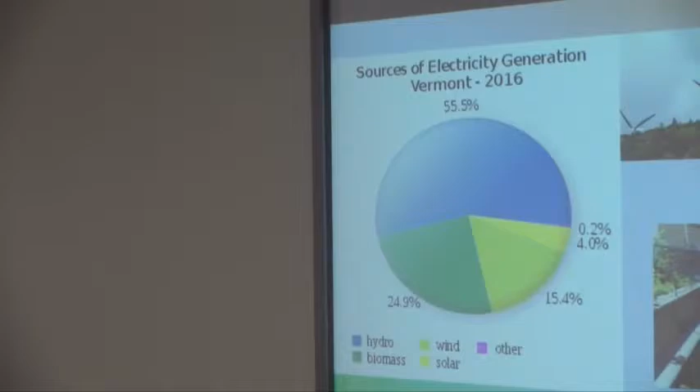But that doesn't mean you can only go with one. When you look at Vermont's energy grid, you can see that most of it is actually hydro. The interesting thing that's happened in Vermont, dissimilar from a Massachusetts problem, is that we have not forced utilities to divest from either distribution or generation. So all that's going to Canada, because the same company owns 79% of our distribution grid and generates 82% of our power - the same parent company owns GMP and Hydro-Quebec.

So anyway, most of it's hydro anyway. Vermont actually ends up having this really great renewable portfolio. However, all of it's generated out of state, which is not good for the local economy. It's generated under foreign standards, so it likely doesn't really qualify as a renewable energy source, which is something we'll get into. But that's an overview of how Vermont's energy grid lays out.

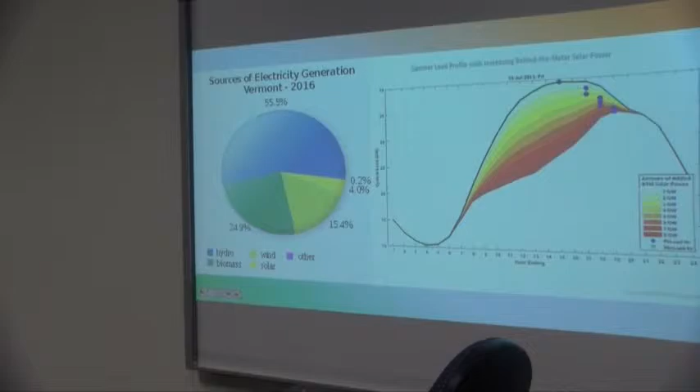Now to go into the weeds - I want to talk about the balance between the importance of solar versus the importance of hydro, because they're both equally important within a grid, but they do two very different things, which is where legislators tend to get confused. Solar does something really important: it attacks something called peaking, addressing it directly and effectively.

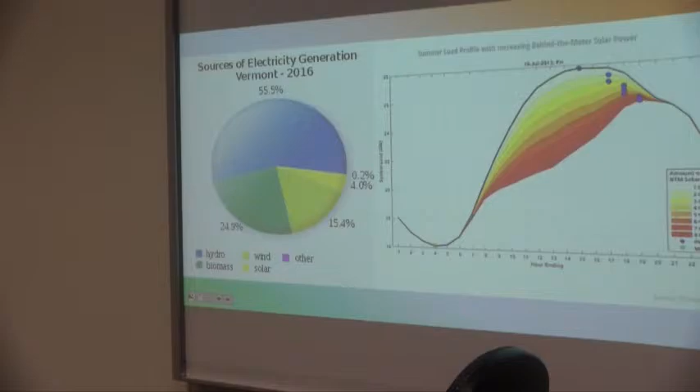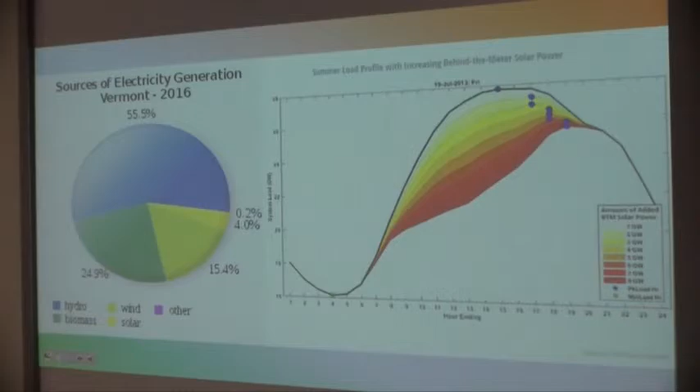Peaking tends to happen, I think in Vermont, between 11 and 2:30, when usage goes up - air conditioners are on, everybody's in their office, using a lot of electricity. That's conveniently when the sun is right overhead, when solar can do the most good. So during this bubble in the middle of the day, we have a massive spike in energy use every day, and solar is a very good tool - probably my preferred tool - for dealing with peaking.

The direct result is that when you have an energy spike, utilities have to provide for it. They fire up a coal plant, or a fossil fuel plant like natural gas or propane, because you can't just fire the nuclear plant up and down, up and down. You can also defer to firing up hydro plants, but then you're no longer running renewable energy because you're not running as a run-of-river, which we'll get into later.

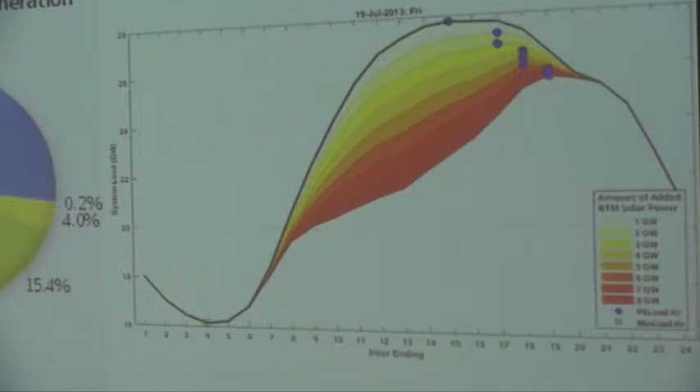So for the renewable choices, solar happens to be the best. However, where does the other 80-85% of your actual usage come from? In this case, we're talking about needing a spike in instant use - a sudden burst of power - but that's not what I'd call the base load, the 24-hour cycle of things always running that need a massive amount of production.

Again, getting into the difference between a solar and a hydro plant, the solar is producing 4.2 hours a day, the hydro is producing 24 hours a day. You have a different unit of production on the same size, same capacity unit. I hope nobody's glazing over yet. So solar, again, is very important, but it does something very different. It attacks peaking and not base load power.

Did you say 4.5 hours solar? I think it's 4.2, and I think that's from a study done a while ago, and that's a little further north than here. Yeah, I think it was actually Burlington, Vermont. Off a non-tracking array, you get 4.2 peak hours of daylight.

Which will get into what I talk about with the energy terroir. What Vermont's doing is going solar, great, let's just put it in everywhere, which is Arizona's energy plan. That's not Vermont's energy plan, because the same solar panel yields you twice as much production in Arizona or California or Florida than it does here. So while you can keep generating, you get half as much production, which you could infer costs you about twice as much to make every kilowatt hour, which is not good for everybody paying their utility bill, because your utility bills just go up for a very long time.

So somebody, I really wish I could remember who did this, I want to say it was somebody out of Stanford, took the time to do the Solutions Project, which if you Google Solutions Project, it's really cool, you can pick all this data. I've chosen their model right now as an example of how you would look at, for the United States, what the energy mix would look like if you were shooting for 100% renewable energy.

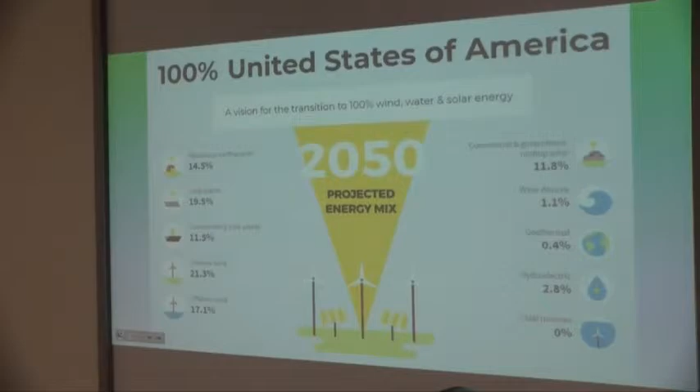I'm not going to spend too much time on this, but I wanted to show you one thing we can distill out of this: that you can achieve it, but you need to look at the mix that you need, which is the term I've been trying to develop, the energy terroir. What are the resources you have to work with? Because you can't just pick a resource and use it if it doesn't fit where you live.

So for Vermont, let's just look right now at only two things. Offshore wind, zero, right? There's no coastline. Hydroelectric, 64.4%. But let's look at how that shakes out against Massachusetts. Offshore wind, best model is actually 55% offshore wind because you can do deep, and this is really deep offshore wind. The wind blows all the time and it actually provides constant energy.

And hydroelectric, 1.4%. So starting to think about how you put that together, the further you are from the coast, the more you're going to want to invest in solar and hydro as energy sources, because there's a cost of transmission. There's a line loss, you're actually giving off heat and you lose power as you transmit it over great distances. So that's a factor, that the further you are from that offshore wind source, the more you want to think about an alternative.

Now, I can't say that these numbers are exactly right, but I put them up there as an example, because when you develop a grid, the things within that grid and within that system really matter, the natural resources do.

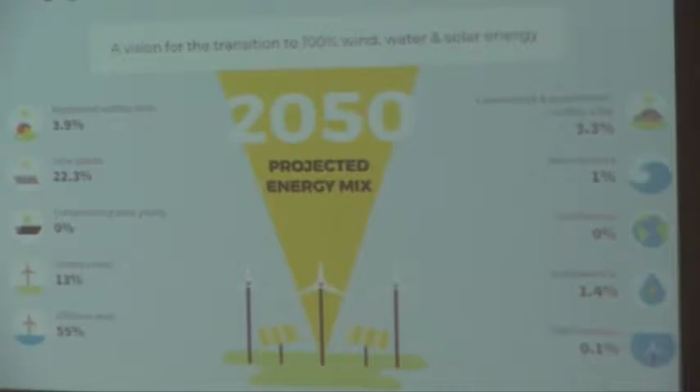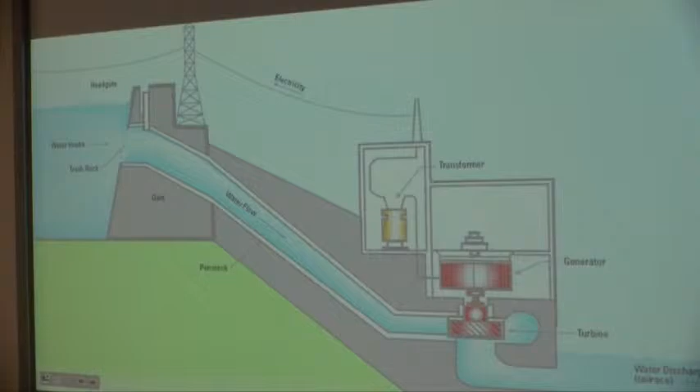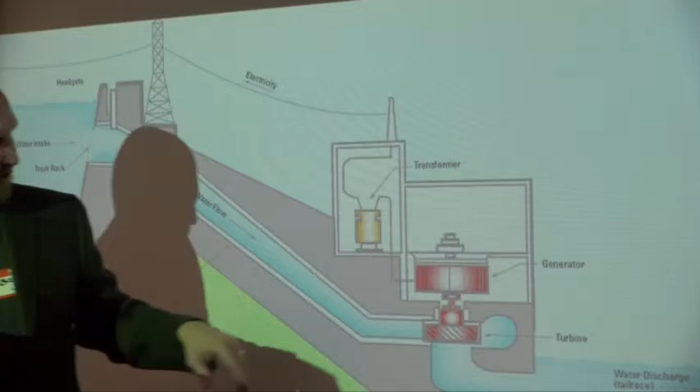So how does hydroelectric work? I like this drawing. So you have water at a higher source that flows through, and all this is going to do is spin a turbine. I'll show you what turbines look like, there's a lot of different varieties for different applications. And then it's just discharged through a draft tube that creates some suction. It's spinning, depending on how you do it, a flywheel or whatever that is, that's going to spin a generator and send it out to the grid. It really is just spinning a wheel, spinning a flywheel.

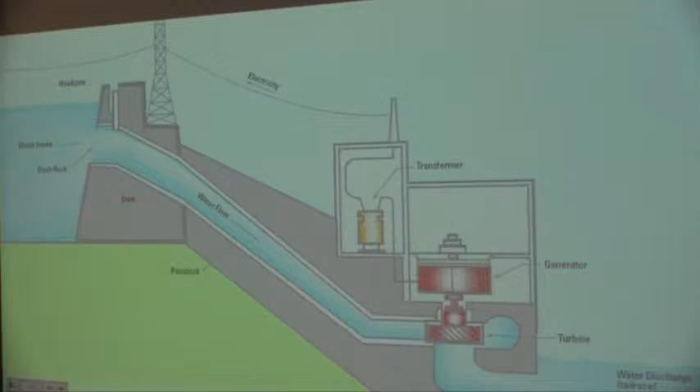The technology, other than that we involve electricity, hasn't changed much since water wheels. The water just spins something and you're trying to harness the energy from that. You're trying to transition that horsepower into whether it's a water hammer or an electric generator. All you're doing is transferring energy. That's it. That water represents power, and you're trying to capture that power and convert it into a useful tool for whatever it is you happen to be doing.

So one thing, and I don't want to go too technical, but it's important to know that there are actually different types of hydro. There's more than I'm going to cover here, but it's good to know what they are.

Vermont Tissue Plant, this is the one I was talking about before that we commissioned to improve the water quality. Part of that is the fact that the plant's on right now, but there's water going over the dam. This is a run-of-river project. In simplest terms, outflow equals inflow at all times. We don't store water. But if we did store water and we were like the Hoover Dam, suddenly we are not a renewable energy source.

Sorry, could you repeat the name of this kind of run-of-river?

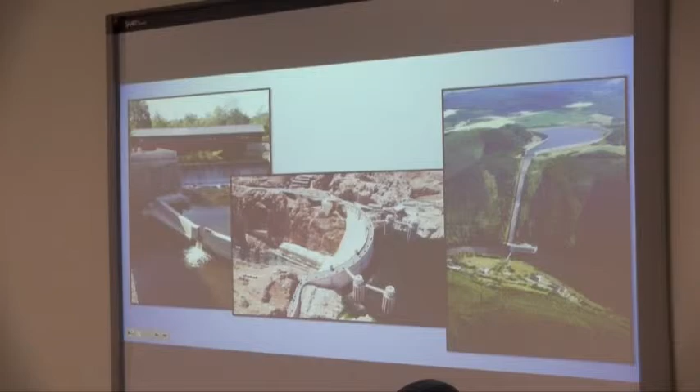Run-of-river. So then you get into conventional storage, which is build a big dam. You let it keep filling. When you need it, like during peak demand, high usage, whatever it is, you turn on turbines in sequence. You keep turning on more and more until you've met your demand. And then at night, you slowly turn them back off and your reservoir starts to refill.

One of the bigger problems with that is it's so reliant on water that you'll find that Hoover and Glen Canyon are at, I think, less than half their actual design head height, so they aren't making much power anymore.

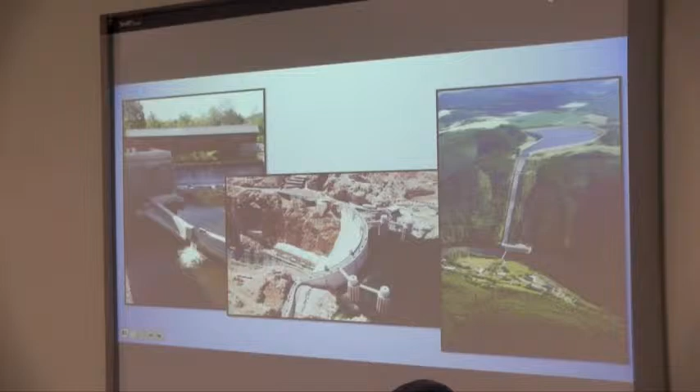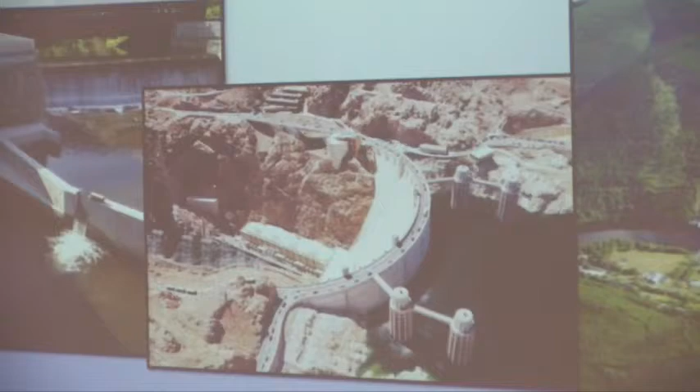And there are a lot of reasons why that's not a renewable energy source. There's a downstream cost because you're raising and lowering the water level. There's an upstream cost, you get algae blooms, which actually give off CO2. So it's way too much to go into here, but suffice to say that as a general rule of thumb, the Department of Energy does not consider storage of this kind to be a renewable energy source.

Then we get into what I think you're going to hear a lot more about over the next 10 years: pump storage. This isn't the best example, but you can see that there's water here and there's water here. That's what I wanted to convey. If that wasn't connected to a river at the bottom, it would be considered from a regulatory standpoint the same as a Tesla Powerwall, it's a private battery storage system.

You have a turbine, and that turbine is taking water from a low source and using a technology like solar, running the turbine as a pump, because a motor can turn in either direction, running the water up the hill, and it sits there until you need it, at which point the gates open and you use that as a generator rather than a motor. And you generate power, immediate, massive amounts of power on demand.

This is where everything is going to go, because eventually somebody's going to start to, yes?

They're going to be common because eventually somebody's going to ding the bell and go, solar plus a battery is no longer a renewable energy source. Because it isn't, because you have the byproduct of the lithium battery. That hasn't happened yet, and that's great because that's what I'm doing at my house. But eventually somebody's going to do that.

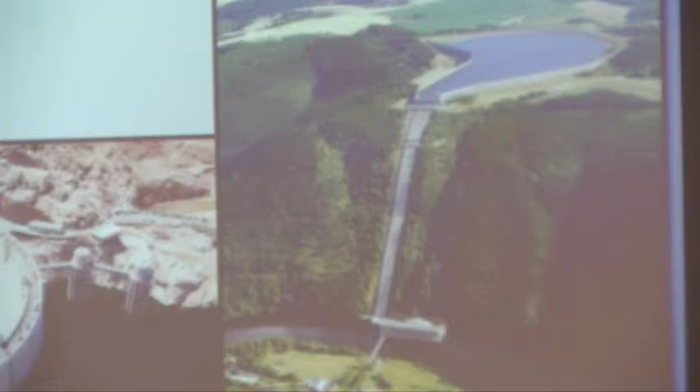The developers, all of the developers, if you were to look it up, you'd find I don't know how many people looking for pilot programs, because everybody knows this is the next logical step to get off of fossil fuels, because some days it's cloudy and you can't rely upon that. Not only that, but you have droughts where you can lose hydro, and I think it's southwestern Australia.

About 3 months ago, I read an article about a project over a huge distance, like 300 miles. They used a bunch of depressed areas along a river and filled them all so they can run for 90 days in a straight drought. They have enough stored power to power that region for 90 days with no water, which is really impressive. In that sense, that's not really addressing peaking - they're using it as a stored energy system. There's a lot of options here, but the cost is almost nothing. There's no byproduct for this. You're simply storing weight to be converted into energy whenever you want it. I wish we had more of them.

Are you going to speak about the environmental impact of that? Because we have studies from the Connecticut River Conservancy showing the one in Northfield is devastating - the fish population, as well as the minute organism population, and it seems to be being ignored. I'd be happy to address that. I need more specifics, but I'd be happy to do that at the end.

So what are some types of hydroelectric turbines? I don't want to go too far in the weeds here because nobody's about to build a power plant, but just to breeze over, in general there's really 5 different things here, even though it looks like 6.

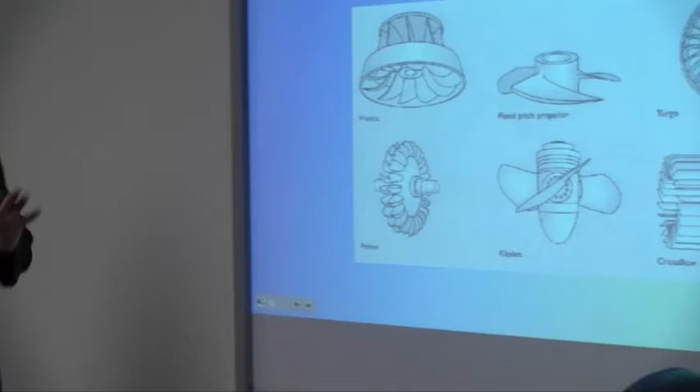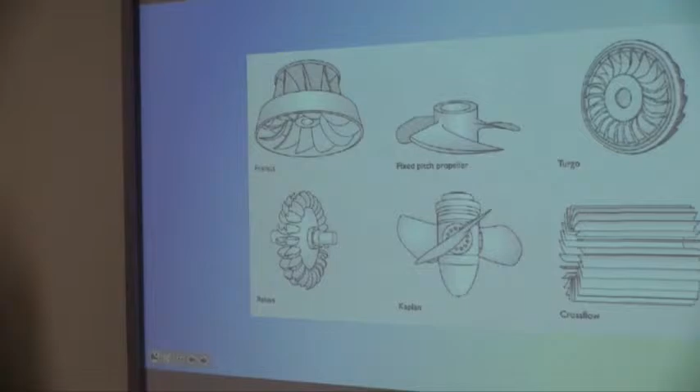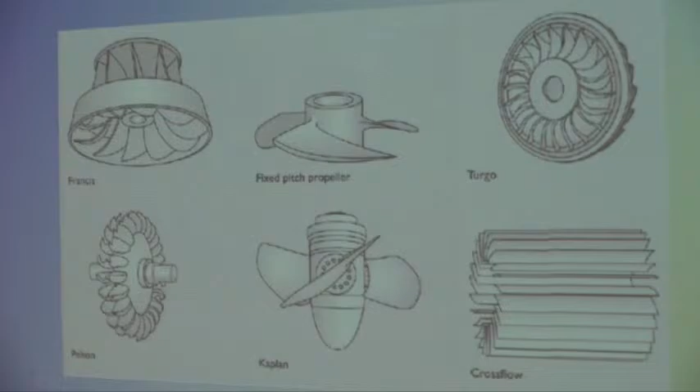Don't be fooled. There's a Francis turbine, probably the most common type of turbine used in this country. There's a Turgo, which is very similar to a Pelton - in both cases you're going to have a water jet spinning a water wheel, essentially. The far bottom right is the cross flow, which was invented around 1880-something in Germany by a fellow named Ossberger, whose full name I'm not going to remember. Ossberger has a patent on it, and they still sell by far the most common, although people have been trying to improve on that design and get outside of the patent for over 100 years. Then in the middle you have a Kaplan.

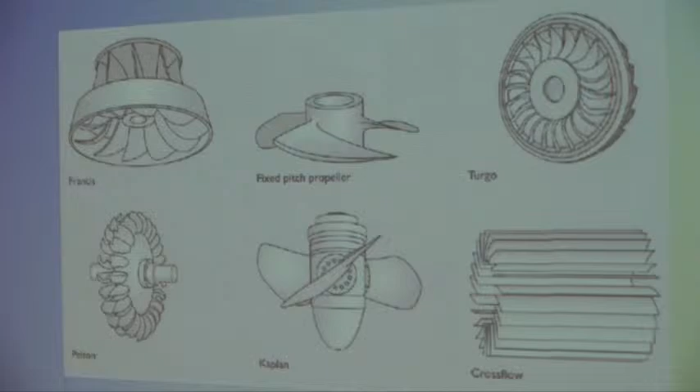And at the bottom is really the type I tend to use for low head run of river, because it gives you a massive operating range - it's a double regulated Kaplan. Our turbines at Vermont Tissue, we have 2 of them, and our operating range with 2 turbines goes from 21 cubic feet per second of water on up to close to 400. A Francis is nowhere near that - it won't even turn on until 70 or 80 on the head that we have. Because these blades can pitch, you can get the maximum amount of horsepower over a broad range of water, so that as run of river, as the river flow goes up and down, this thing just constantly adapts and keeps the head where it's supposed to be.

So this is kind of how these all come together into an actual plant. The runner from this one typically sits in a spiral case - the water comes in and goes down. In this one you have a jet of water that spins that wheel. Here you have multiple jets. Over there you can see the water kind of comes in and spins that wheel. And here you have how a traditional Kaplan, fixed or otherwise, would work.

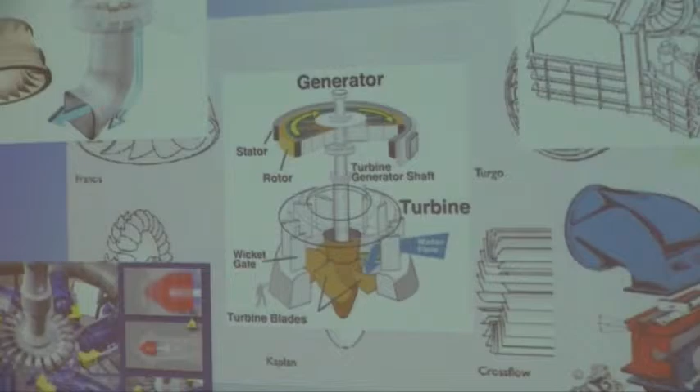And they all do very different things - the one in the center is really the best for super low head, which is where I am. If you get in the 10 to 15, 18, 20 foot range, that's where you want to be, rather than running this massive volume of water. There's this really neat thing - as a general rule of thumb, every foot of head that you increase gives you about 10% more power.

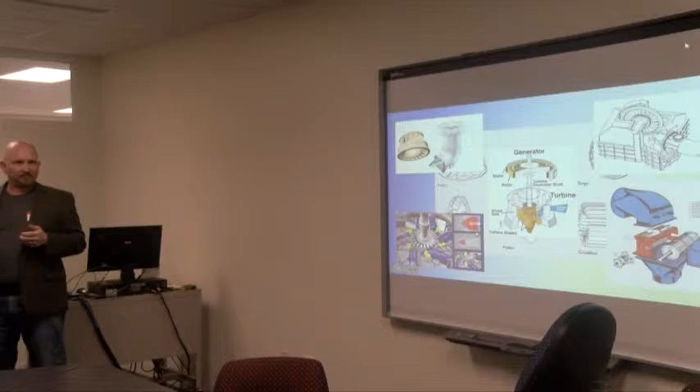To put some value to that, I think the infeed to the Readsboro plant - you have Somerset and Harriman, thank you - the infeed to that is not substantially larger than the plants that I'm running, which are 360 and 491 kW. But the highest head I'm running on right now is like 18 feet, and so I'm getting under 500 kW on a river that, when they use the same size coming out of Harriman, they're making 44 megawatts. A massive increase in power on the same amount of water, simply because there's so much head affecting that water that you end up with a huge amount of power.

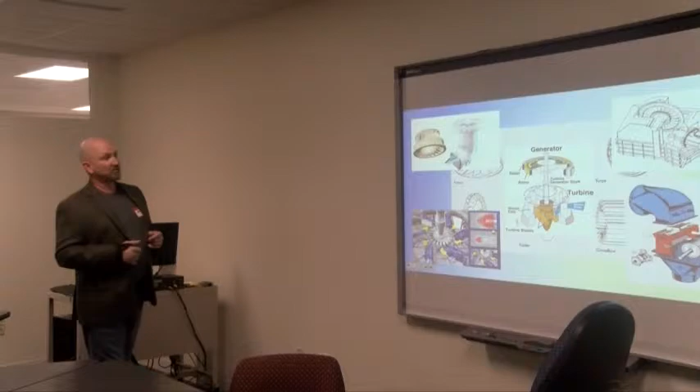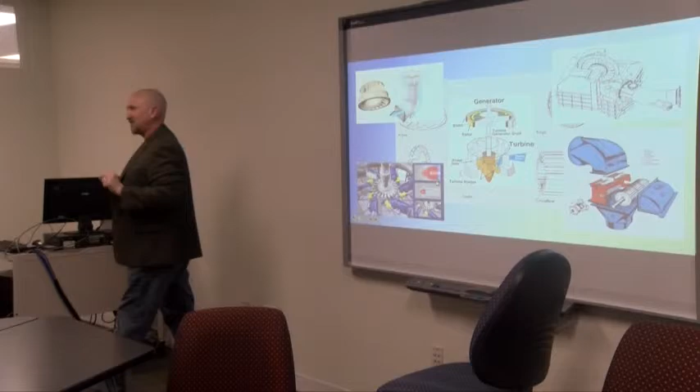So head is a really critical component. You see these little water jets here. I mean, this thing just sucks up a whole river into it. These take huge amounts of water, except look at this, and there's these little jets, these teeny jets, because you use a small amount of water with a massive amount of pressure behind it that then spins the wheel.

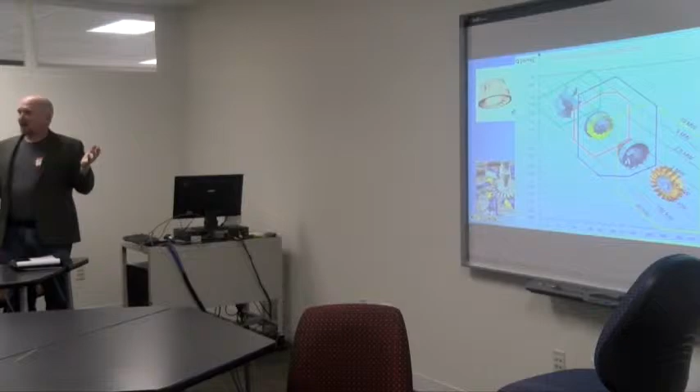So anyway, when you look at this, there's ranges in which these turbines tend to operate best depending on how much flow and how much head that you have. I just wanted to show, as a general rule so people understand how this works, the ranges that you would typically try to use these different types of turbines. This is something you would figure out when you were designing your plant, but I find it fun to explain to people.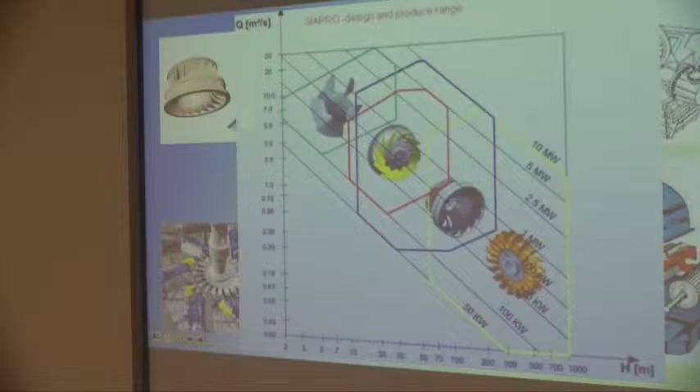So getting into the nitty-gritty, how would you identify the flow for a site? I've talked about the fact that you need head and flow to figure out your horsepower, which then can be converted into kilowatt hour, or kilowatts, very easily. It's great in this country because we have the USGS and it's all open source.

Very quickly, I'm having trouble with the definition of head. Head: vertical feet between the bottom of the water and the top of the pond.

I'm going to go back and show a slide again and show you. Head is simply the amount of gravity exerted, and you usually express that between the height of the headwater at the top of the pond and the tailwater at the bottom of the turbine. The distance between those two points is the head. And I will get back to it.

Going into flow, USGS is fantastic. I can tell you what the flow is right now on almost any river in this region. And I can tell you, like at Vermont Tissue, what it's been all the way back to like 1932, I think. So all of this information is stored and it's all easily accessible.

So when I go to look at something like the Pownal plant, I know that there's a gauge here, and you can't really read it, it's a little out of focus, but I know that there's a gauge there. I can identify that gauge, and then I can just go find the basin characteristics or the data for that and pull that up. The drainage area for that gauge in Williamstown is 126 square miles of drainage area. That's the first number we need. 126 square miles drainage area at the area where USGS is taking all of their measurements.

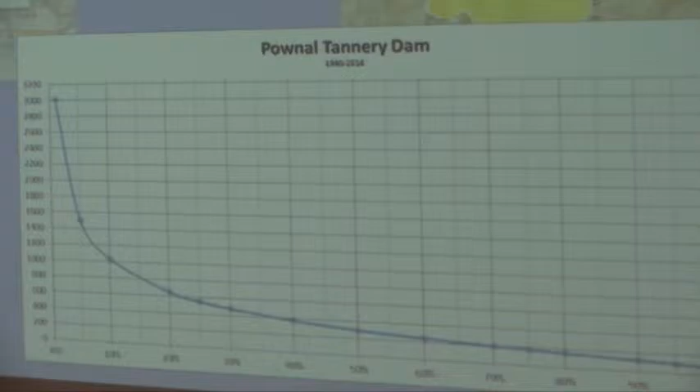And then I can convert those flows into something, and this looks very complicated and it's not, into a flow duration curve at the Pownal Tannery Dam. So I've taken the gauge data from 126 square miles, and I've converted that into a chart for 224 square miles. So I now know if I want to build this thing, I can pick a variety of things.

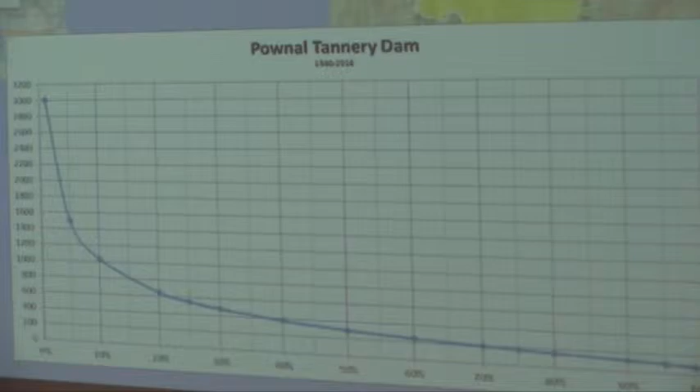Most people would build to the 85% exceedance, which surprisingly is 15% on the graph. 85% of the time, you're okay. And that's going to land me right around 800 cubic feet per second if I elect to build that.

Which is typically how you would build a run-of-river plant. We didn't build this one that way. But I now have a set of values, so now I can look at this and make decisions on how much flow I want. Question number one, how much flow am I going to be working with? And so now we can make those decisions.

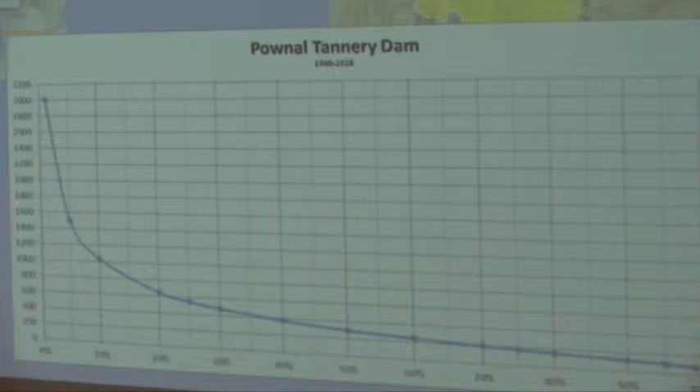This whole project right here is probably, I don't know, if I went up to a site and I didn't know anything about it, I can't imagine I would spend an hour on it, because it's all available data. So you begin to assess your site, and you now know how much water you have.

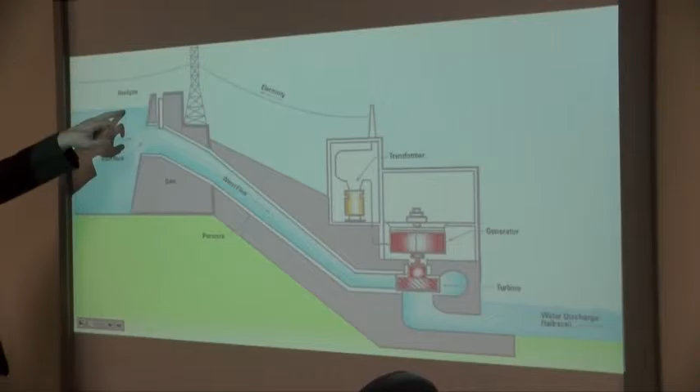And getting into head, so you would ask me a question about head. In simplest terms, you have gross and net head. Gross head is just what it sounds like, it's just a distance of measurement. So you have a measurement from this point to this point, only vertical though. You're only worried about the vertical height, not the distance between the two points. You're worried about the distance in elevation.

That gives you head. So once you measure that, and when you're looking at a dam, it's actually just measuring above the dam and below the dam. That's it, that's all there is to it.

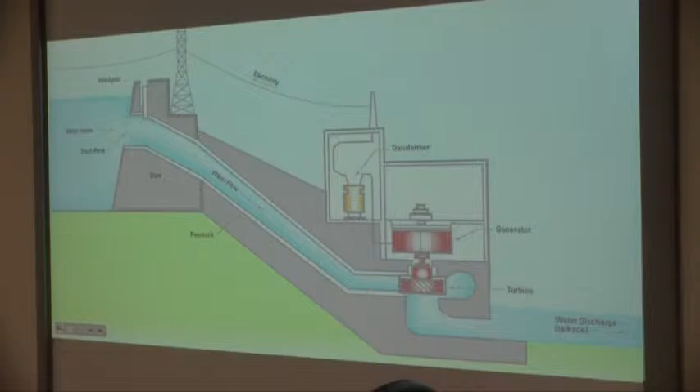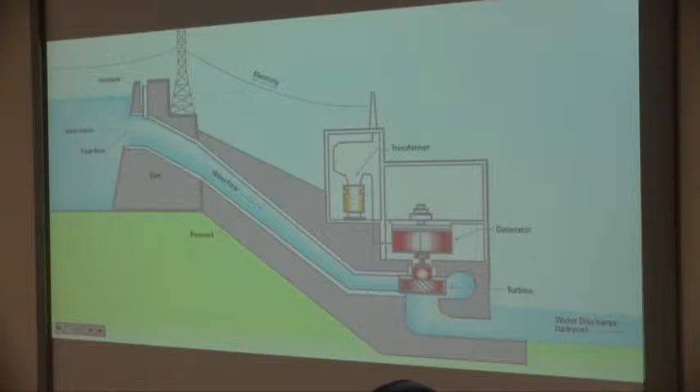Usually on my own, I'm not a surveyor, but I'll go shoot those, and I can usually do them fairly accurately with a laser and a float and just a staff on the downstream end. I can land close enough to actually look at what I think a project's going to do without spending the money on a surveyor. And I've done this with classes where we'll go out and build entire plants, and we won't hire anyone to do anything. We're just out there doing it with a tape measure, low tech, and it's actually kind of fun.

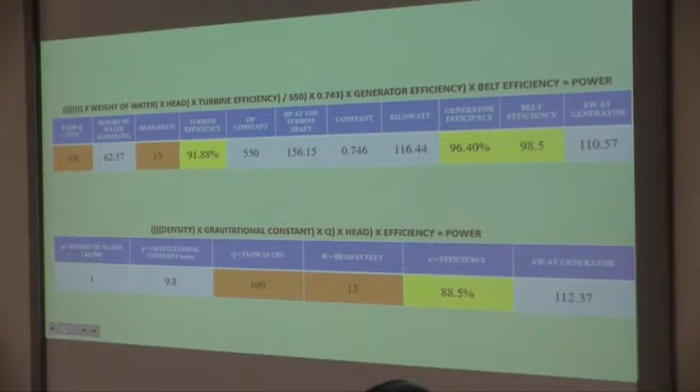And now here's where the magic happens. You only need to put two numbers into either of two equations. These two equations always give me slightly different results, which is what I do most. I think you'd find this is what a teacher would teach in college, and this is what anybody who builds hydro is going to use. They're always different, they're both legitimate numbers, and they're always off by like 1% or so. I never get the same result with them. But that's all it is.

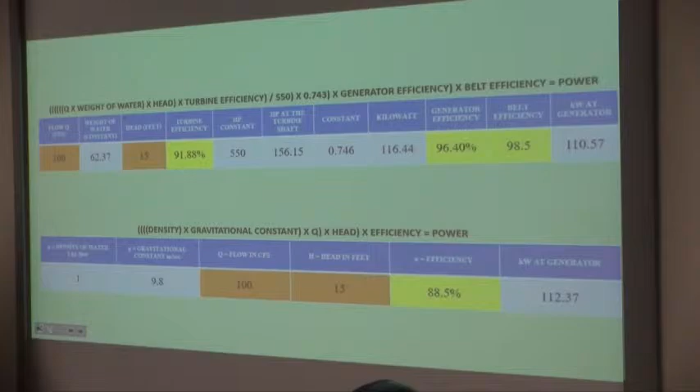If you elected to go with 100 cubic feet per second, you then have a variety of constants and things that you can plug into this. Then you have a weight of water constant. Now you're going to put in your head in feet. I just picked 15 as a random number.

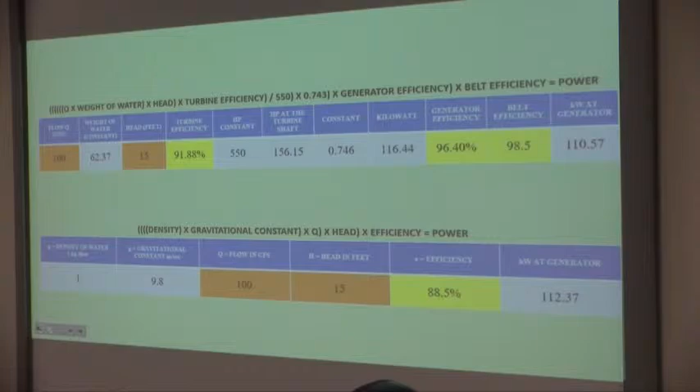Turbine efficiency, generator efficiency, belt efficiency, I actually gathered those from the plant that we just built. So if you really wanted to be conservative, you could net those out to 85, 86%.

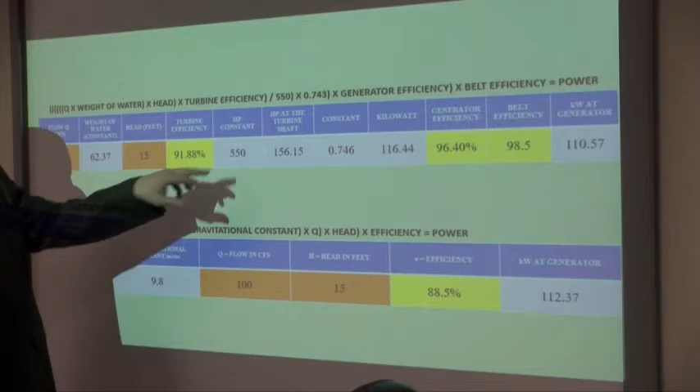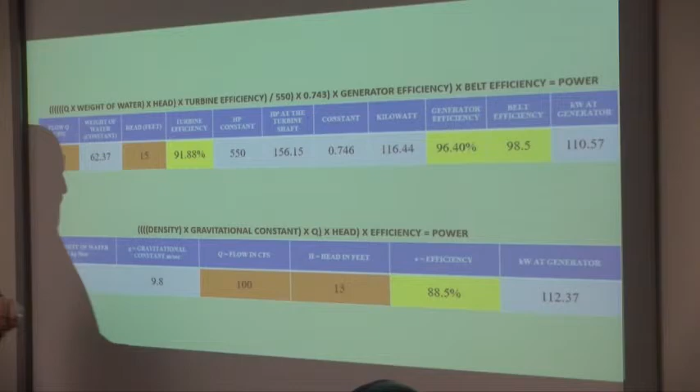Horsepower is a constant in this equation. So you're actually multiplying a bunch of things to get up to 550, which will then give you - we know at this point we have 156 horsepower at the turbine shaft, but we still need to get that to electricity.

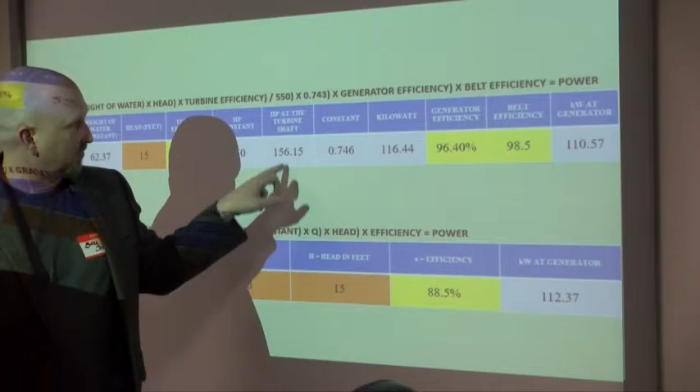So then we have another constant, and we can get to converting horsepower to kilowatt, which is simple. You can do that on your phone. You can convert horsepower to kilowatt. It's a really basic formula, one thing times another.

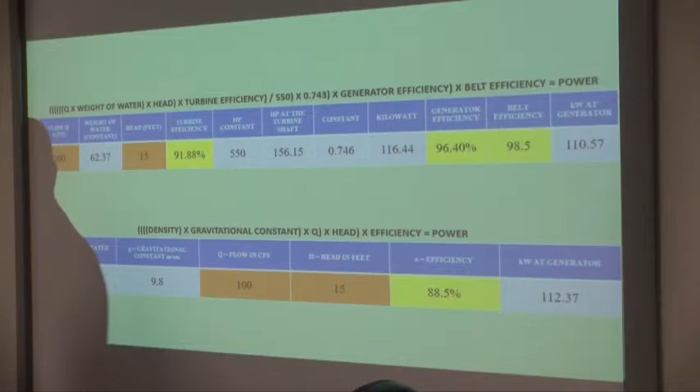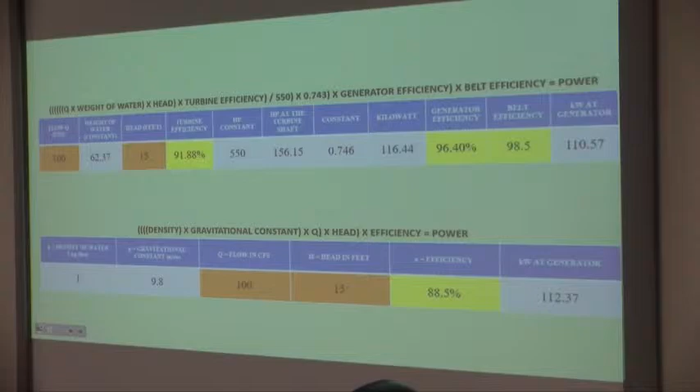But then we just need to plug in generator efficiency, because the generator is going to have some resistance, and the generator is going to give off some heat, so we're going to lose a little power there. And then we're going to have our belt efficiency. In this case, I used a belt. If you use a direct drive shaft, you wouldn't have that number, it would be 100% rather than 98.5.

But the final result is we're going to have 110.57 kilowatt at the generator, which means if this ran 24 hours a day, if you had built this way undersized for your plant, you'd be at about 110 kilowatt, 24 hours a day, 365 days a year. Don't think you would build it that way, but in simplest terms, that's what you would have done.

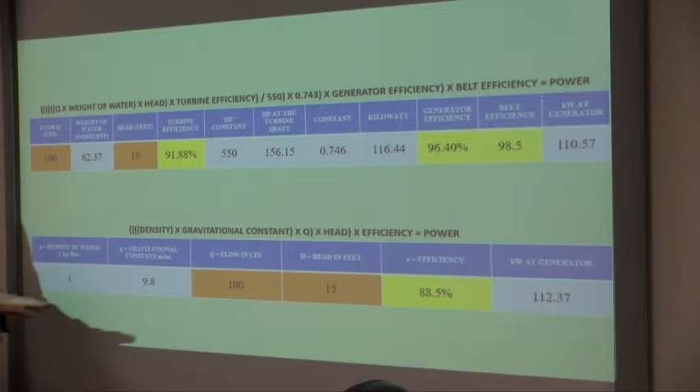The other formula is similar. Again, it's more of an academic approach, and you still need to plug in a field number that you would get from actual turbine efficiencies. I think a conservative number would be 85 if you were using less efficient equipment. I know that ours is 88.5, so I can just use that.

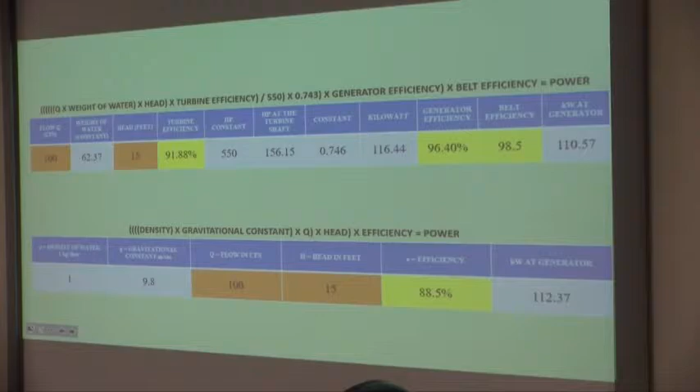Yes? How does this relate to the seasons?

That depends on where you are and what you're building, that's why you build to 85%. You typically don't want to build to the maximum flow you ever have, because a lot of times, like end of July and August, the flow is low. That's where it gets a little technical with the type of plant you're going to build, and how much head you have. If you're dealing with a lot of head in a big reservoir, you just max the thing out all the time. But for something like the Vermont Tissue Project, we built that to the 85% exceedance.

We built it in a very classic manner, but with incredibly efficient turbines with a really wide operating range. So we only need to meet our environmental flows, which are about 21 cubic feet per second off the top of my head. We have 2 dams, so that's the flow over both dams plus flow for fish passage. Once we meet that aesthetic and aquatic flow at 21, we need to make another 21 until we're operable. So when we hit 42 cubic feet per second, we come online. Looking at the flow duration curve, it's less than 1% of the time that we have that little flow, and the rest of the time it just follows the river flow automatically.

That plant should have been running continuously, because it has no maintenance that would give it downtime, for something like the past 18 months. It would never have shut down.

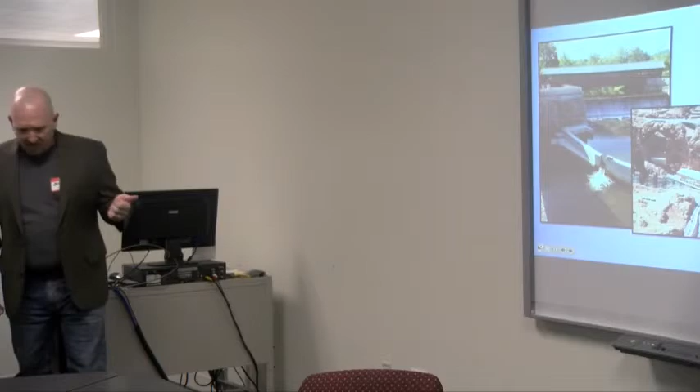The other plant had a huge amount of PCBs, the only site of its kind in the country where you have contamination from one state depositing in a second state, which ended in 1972 with the Clean Water Act, actually it might have been '76 by the time it was fully implemented, and then continuing on down into the Hudson.

What we realized when we did our core sampling is that the cost to actually get the material out of the river is way more than the cost of testing, so we said test for everything. It shut the lab down for three weeks, they couldn't get the equipment clean because there was so much DDT and cyanide in that river. Nobody even knew that was there, and the battery of things in there was unbelievable. But to think the DDT was a worse concern than massive levels of PCBs, let that sink in for a second.

So what we ended up doing with that one is we cofferdammed off the river, went in dry, took all this stuff out, dewatered it, and it's all in a lined landfill now. So that's what I'm talking about when we talk about cleaning up the toxins in the river.

And that design for maintenance is integrated into any project you'd take on? Yes, in most dams. Most of them don't have the contamination problems we tend to deal with, somehow I end up with all the toxic stuff.

I don't think that's been put out there to use yet. It was unusual, nobody knew how to do it in Vermont when we got to this. It was being done in the Hudson, but nobody had ever done it in Vermont. We've done it twice in Vermont now, but there's just not a lot of development on it.